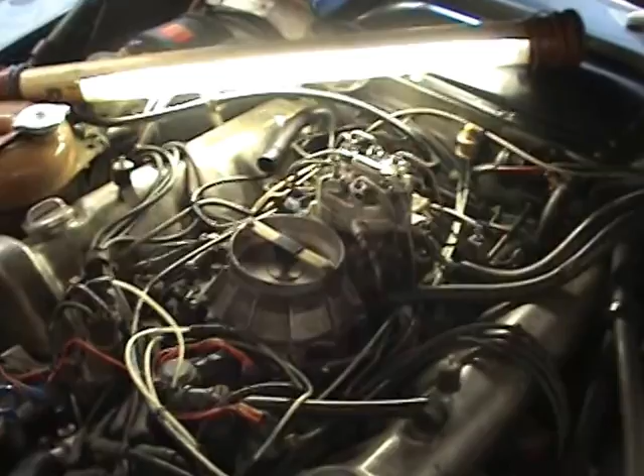So I can talk about this car and how it relates to other 450 cars, and give other people ideas of how their car should be performing. So here we go, I'm going to talk about the characteristics of a 450 SLC. What I thought I'd do is a quick run through of what I know of how the engine works.

We all know at the back of the car it's the electric fuel pump and the filter and other minor items to get the fuel up to the engine. I've taken the air filter off so we can see what's going on here.

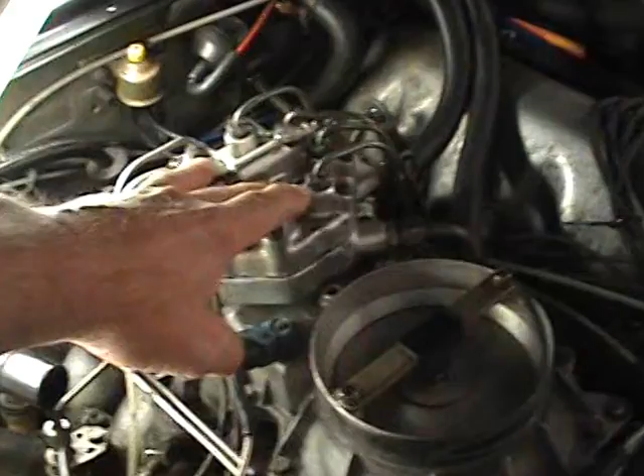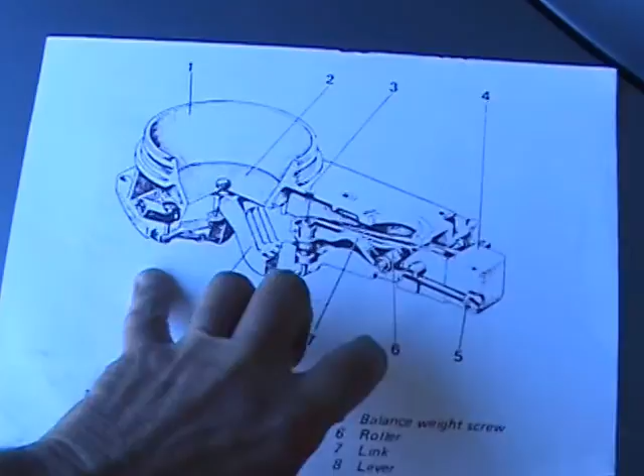Here's your fuel distributor, and down in here on this air plate is a counterbalance. I'll just show you the counterbalance. There's a counterweight here and the air plate there, and when you open the throttle down in the car, it draws air into the intake manifold, pulls this plate down, and at this point here there's a pin.

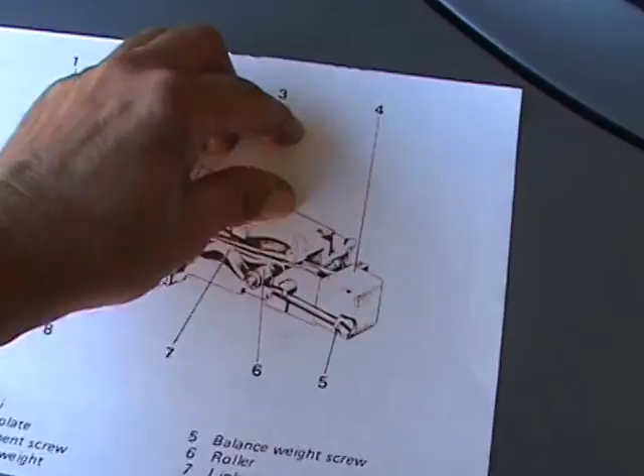It's like a little shaft, and up here it goes into the fuel distributor, and the piece, unfortunately I haven't got one, has slots in it. So when this goes up and down, the slots increase to let more fuel into the fuel distributor, which runs through to your fuel injectors.

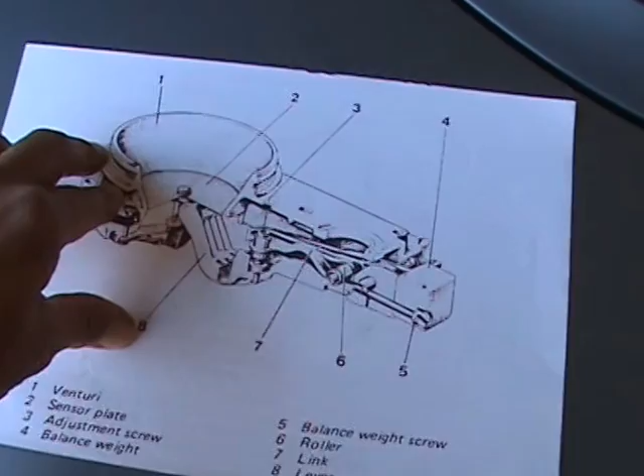Double Dutch, I suppose. Back to the engine. Here's your throttle linkages. As you can see, it comes down, goes right down into there. So what I'll do, I'll just open the air intake here, and you should be able to see a butterfly valve, if you want it opens like that, down in there.

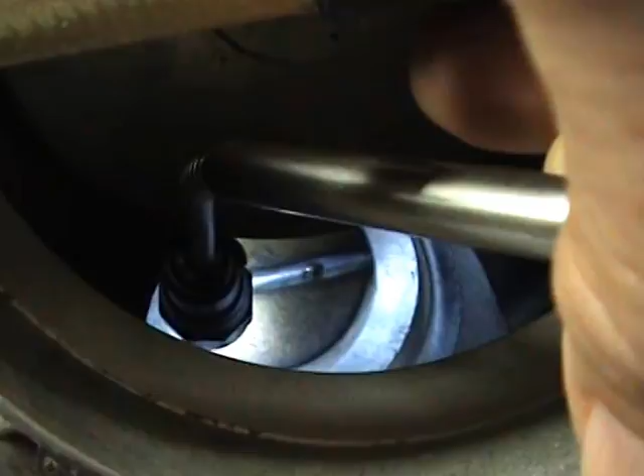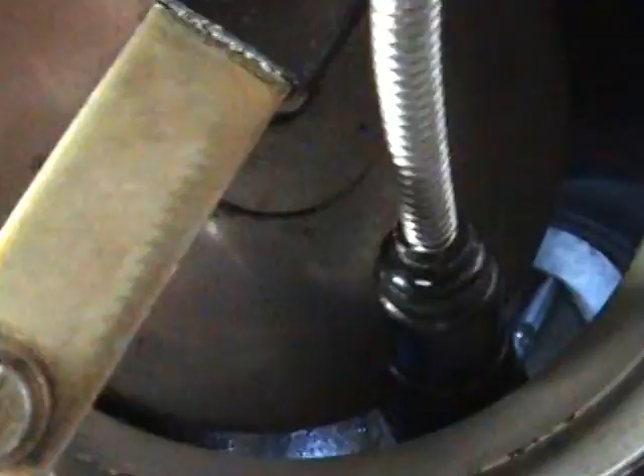I'll just get a torch. So you can see down inside there, there's that little flap, I call it a butterfly flap or something. You can see that opens when you throttle, pulls down this plate, which I've got my light holding down, and when you throttle, it pulls that plate down, and the counterbalance moves up and down here.

Right. Now the major thing with these engines is the starting, and we'll do the warm-up valve. Okay, here's the warm-up valve. Inside it is a thermal strip, and it has 12 volts applied to it. When you put the ignition on, it warms it up. I suppose that's hence why it's called a warm-up valve.

I had trouble with this one. The voltage wasn't working, mainly because of a broken negative connection, and the car won't run - it just goes completely haywire. So this is very, very important, and that's why I have these new wires here, so I know what parts of the car I've had to...

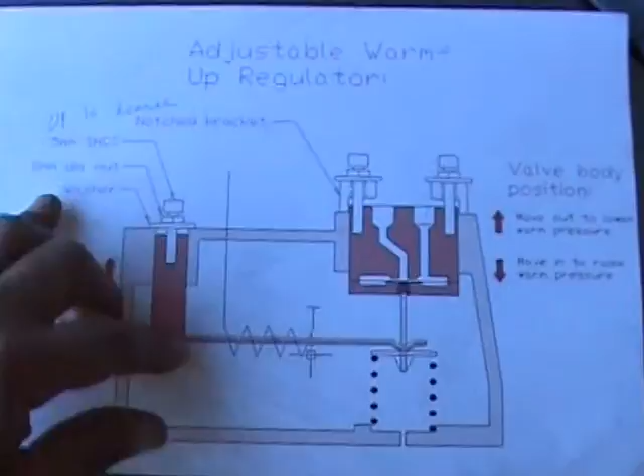...replace a bit of wire on. It also regulates your fuel pressure. Over here, I'll show you this, a little diagram of the warm-up regulator. This is the thermal strip inside the warm-up regulator, and it has a coil around it. That's for the 12 volts to warm it up, and it moves up and down here to adjust your fuel pressure. It has a little adjustment screw on this side here, but the adjustments really are minimal.

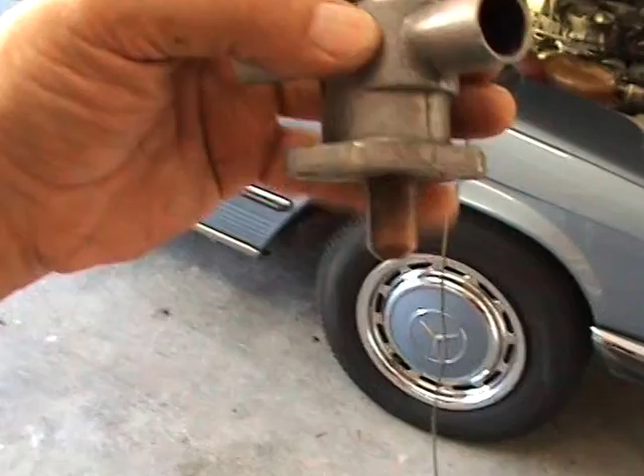Okay, over here we've got the auxiliary air valve, and it runs from the temperature of the water in the block underneath it. I shall show you a broken one. You can see the sensor here senses the water temperature.

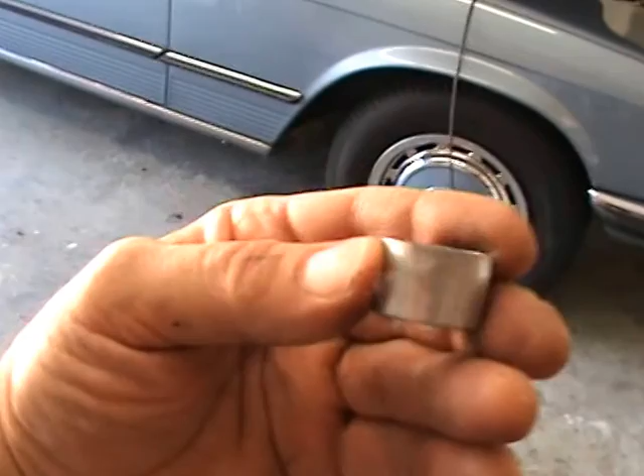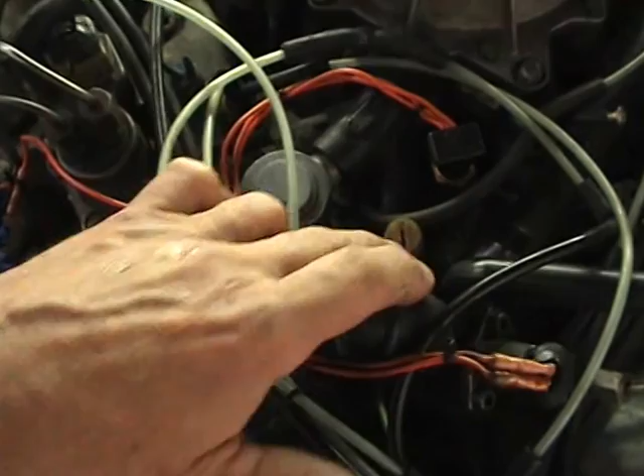Inside it has a base and a spring, and a piston moves up and down. You can see the slot there where the air would go through that hole. This is a broken piece of piston, and it goes up and down by engine temperature. Over here we have an idle screw, the amount of idle - that's how much air goes into the engine here.

This will be in a position to allow max air for the cold start, and your warm-up regulator comes in, and once the engine heats up it turns down.

Very interesting. So when you start the engine here, she kicks off at about 1100 revs, maybe up to 1200. Nothing you can do about it.

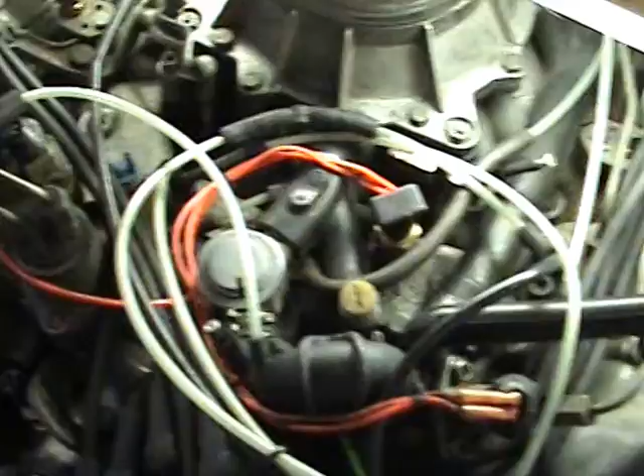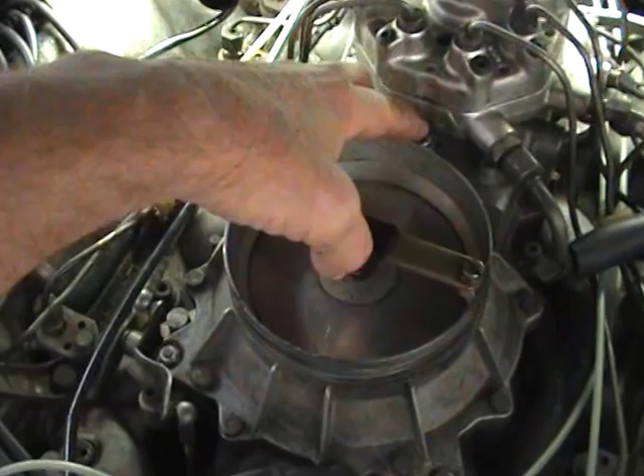The only adjustment we have on the engine is the idle mixture here, not the running mixture - you can't adjust that. It does that here with the air plate, adjusted with a 2mm Allen key. You can adjust your revs on this screw here, and a little nut here, but it does minimal adjustment anyway. So you really have no control, even though this engine is 100% mechanical.

Up the back here of the vacuum lines, we've got a little valve here, and that's for the vacuum advance on the distributor. All these vacuum lines around here, when I got the car, were not there. It ran like a dog, believe you me.

There's another little sensor down here, the blue one. You can see mine's totally disconnected down there. That's for the smog pump, which we won't talk about.

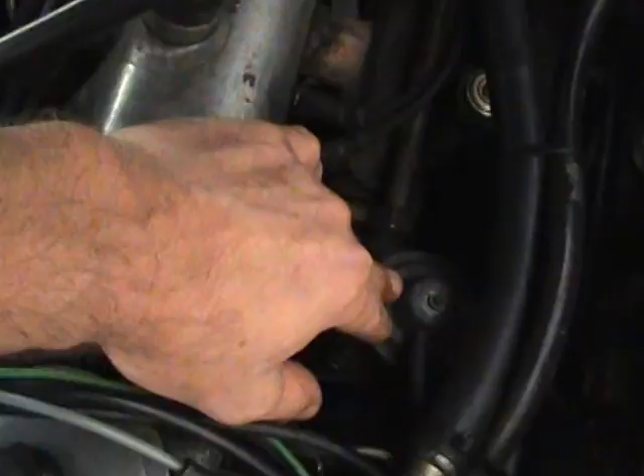Another one over here, this sensor - that is for the EGR valve over here, exhaust gas recirculation.

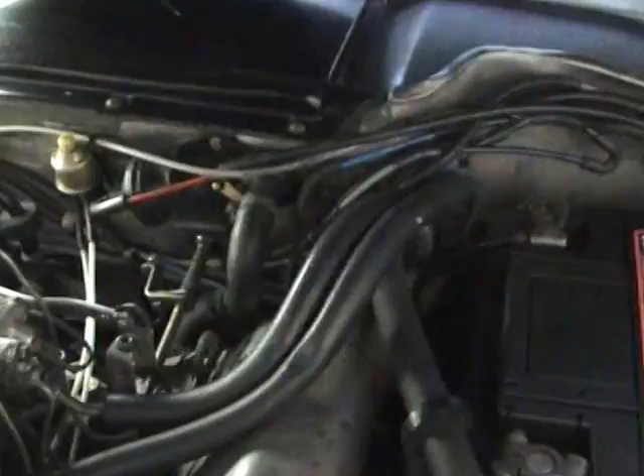And that's about it. All these vacuum lines up the back here do your central locking - your doors, petrol cap and boot. You only get about half a dozen goes. They also do the flaps for your heater and everything behind the dash. That's the heater valve here, and that was a problem when I got the car first too. So they're all working - you don't want a vacuum leak. That's number one.

Anyway, let's see how a short description of how the engine goes.

I might add that I'm going to start it shortly - since I've mucked around, pushed that plate and everything, it might start a bit rough.

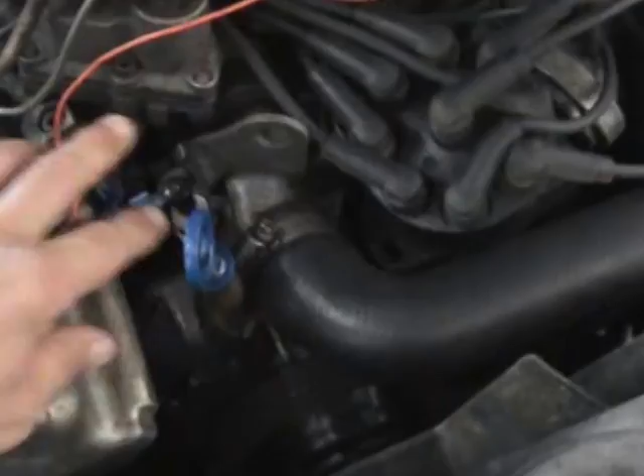This car has a Bosch K-Jetronic fuel injection system on it, and the block is cast iron and the head's alloy. I'm just banging the air filter back on, and I thought I should mention this - this here is a temperature sensor for the cooling fan at the front, the electric one there.

Interesting enough, it's set at 100 degrees Celsius, so it won't turn the cooling fan on until it reaches 100.

It's quite high. The thing that drew me to these cars is I always wanted one because I just love the shape. They've really got lovely lines, it's sort of timeless. I mean, you wouldn't know this thing was 40 years old.

There you go, down the front there. It's amazing, isn't it? I wish I had one when I was 40 years old, because you need to be younger for these sort of cars.

The doors are very heavy, quite large and heavy, and you've got to climb into them. I noticed the other day an old guy was selling one - he's 75, and he said him and his wife just had trouble getting in them anymore. Well, my wife has a bit of trouble getting into our one.

The dash and everything is quite basic, which is great. You got a knob there, which I changed the other week, for the fan - does the fan for the heating and cooling. A switch here for the air compressor for the air conditioner. A knob here just does the speaker balance for the radio, and slides for air up and air down and heating. That's it. Marvellous. Who wants all the other bullshit?